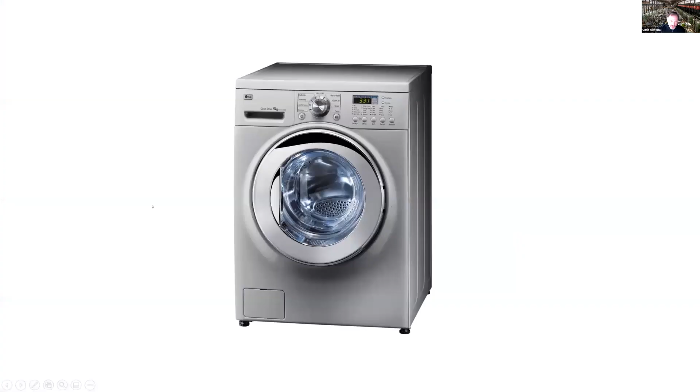Not letting me advance. Okay, so this is an LG washing machine, and I put this slide back in after hearing some of the other conversation, but they make this in South Korea by the tens of thousands. It can wash a household of teenage boys' clothes perfectly, and when it's finished, they're pretty much sanitized and wring dried.

It can do all of this if it has 4 available standard components, attributes: power, water, space, and discharge. So power, water, space, and discharge, if it has those, this thing will work in Korea, it'll work in New Jersey, it'll work in Palo Alto, and it'll work on my front porch in Alabama, no problem. In the absence of any one of these attributes, it is a very expensive, complex paperweight. So the point is that for industrialized construction to work, it needs an ecosystem to tie it together.

So in 2008, we had an architecture company, we still have, and it's doing a number of things that are challenging. We had just gone from kind of a land of plenty to a land of emptiness, and it gave me time to rethink what we were doing as an industry. And so we started with what the future state is of what we wanted to be by understanding what the current state of the architecture, engineering, construction world was.

And so the future state was not this siloed AEC industry that we have. It was envisioned as something that was different. We called it design, manufacture, construct, and we replaced nouns with verbs, with the notion that we would go from architecture to design and action, that we would add manufacturing because intuitively, even though we hadn't figured anything out about it, we knew that it was an incredibly important component, and we would go from construction to construct, and we would think of these things as a singularity as opposed to 3 discrete pieces that happen in a flow.

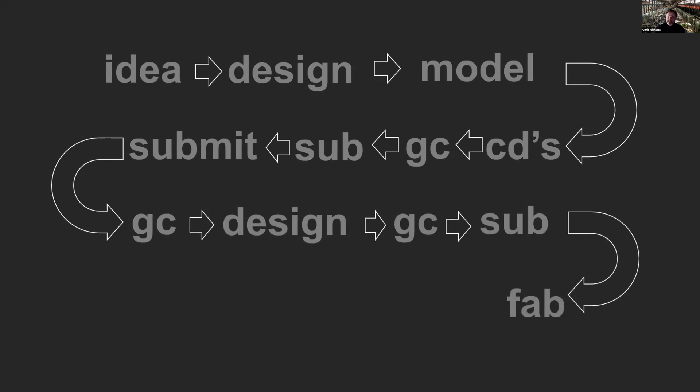The current state goes from idea to design to model. From model, it goes to construction documents. It goes from construction documents to general contracting, who break it up into subcomponents, which go out for submittal, which then go back to the GC, which then go back to the designer for approvals, which go back to the GC with modifications. And you get this insane project flow where way down here, eventually, we get to use it, or someone gets to use it.

And most of the construction technology is focused on the gaps between each one of these phase gates, and they are looking to shorten those gaps. And we started with this notion, or we explored it some, but we really came up with the realization that no matter how small we made the space between those, it would not create the 2 by 2 by 2 effect that we were looking for.

So we went from model to fabrication as the idea, and how would we set up a future state that would allow that to exist, because it's really more complicated than it looks. And the objective is not to work within the existing paradigm, but essentially create a new paradigm that replaces it.

It's undergirded by technology. Our technology is probably the dumbest technology on the planet. That doesn't mean that we haven't been working hard on it. Amy's got much better technology, though we use a good bit of hers. But the idea is a technology platform has to undergird some of these analog processes that we work on, and we take material constraints and we work those with design constraints and logistic constraints. We go from there. All of that resides on the cloud.

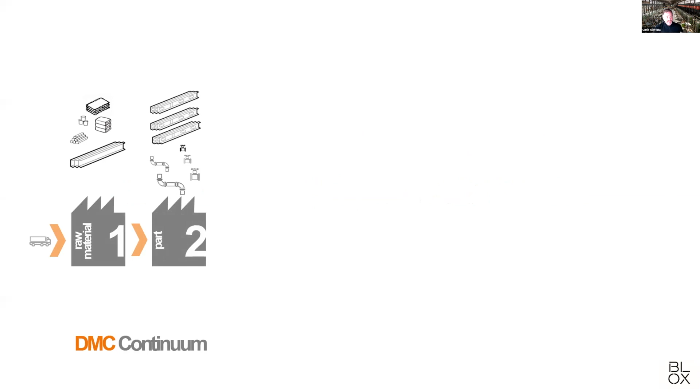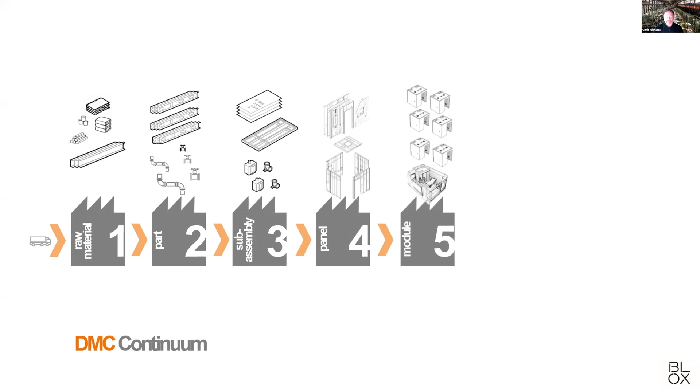All right, so this DMC continuum is important. It starts with idea, design, model, fabrication. From there, we'll break down fabrication and look at it a little tighter. If we take raw material, we use G-code to turn raw material, whether it's coil or stick, or plate, into specialized parts with digital tools. Those tools then turn into subassemblies that are put together by operators versus craftspeople. Those pieces are then added to panels. Panels are turned into modules. Modules are turned into what we call an Uber module, which is a large module, which turn into buildings.

And it's unnecessary to think of this linear process this way, because I can go from raw material to a subassembly, or a subassembly to a building directly. I can bypass any of the other pieces. So the notion of what we are, or what we think the industry needs to be, is not one or the other, but simply an optimized path through the conversion of raw material to building. And there are many, many neural pathways to get there.

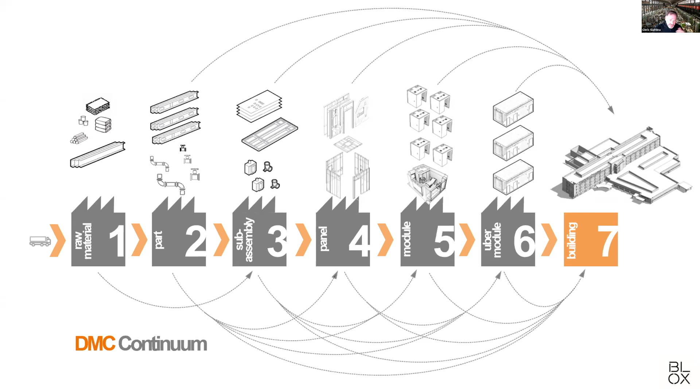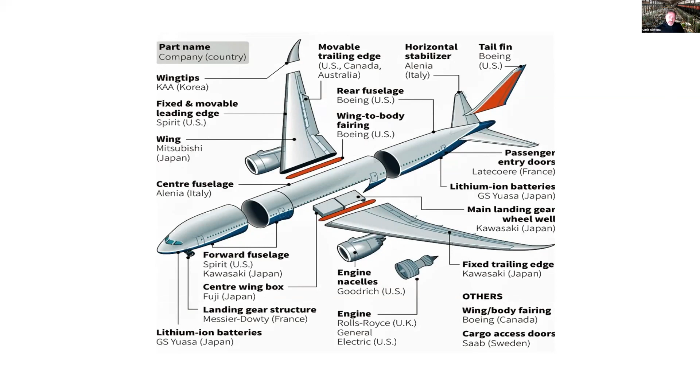So the next point is what do you do with DMC and how do you apply it? We use a methodology called chunking. It is not our invention. It's not even Boeing's invention, but it is something that they made famous with the 787. This really complex airplane is made in 22 chunks in 9 countries. This chunk happens to be the forward fuselage, made in Japan.

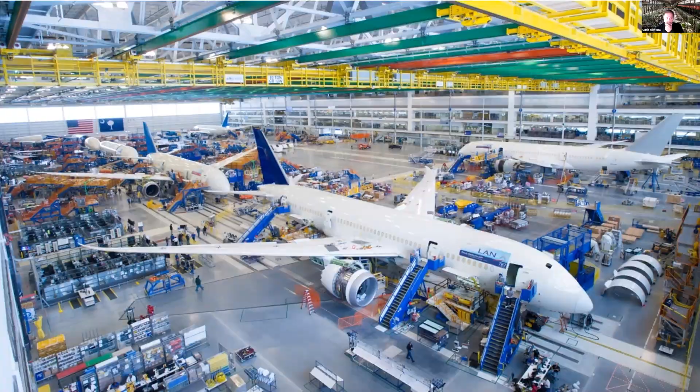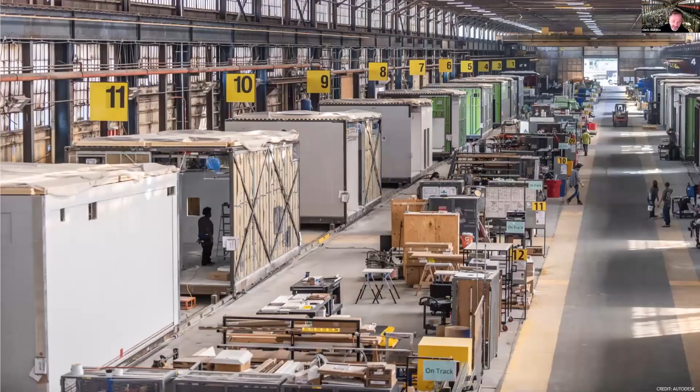It is completed down to its paint, and goes with the other 22 parts to Charleston to create what I think is the construction site of our hopefully near future, to make really complex pieces fast. Our chunk is an Uber. It's 15 feet wide and 15 feet high and 60 feet long, and it's packed with complexity. And we make it in a plant that is producing 20 of these a week. It is putting any number of them together to make one building. The resultant is space that does not look like the space that's made of the parts, but rather it can be open and well lit.

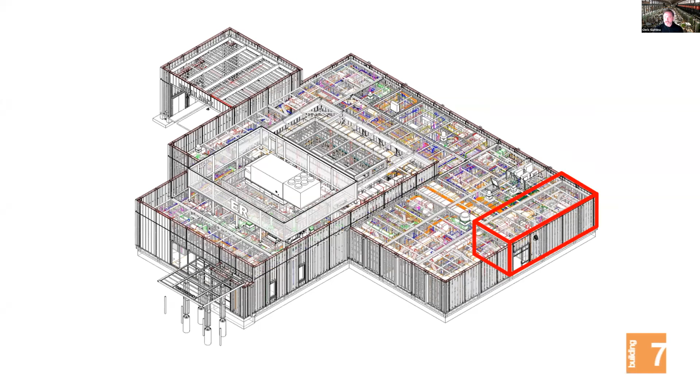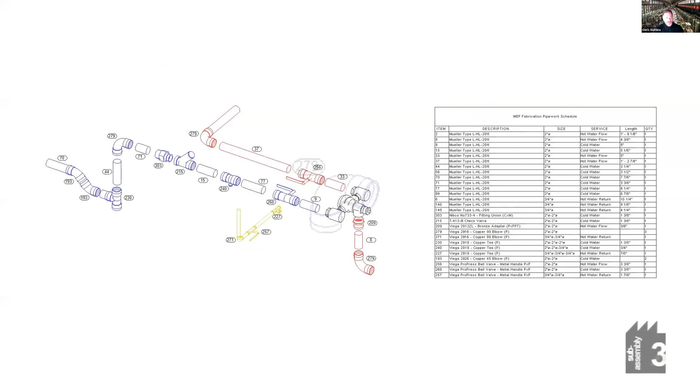If we zoom into that, you can see that it's chock full of complexity. That complexity can be broken down into granular forms that we make as nested parts. This piece is a MEP rack, which has in it MEP parts, which are broken down into a bill of material, which goes all the way down to how do I buy a copper elbow.

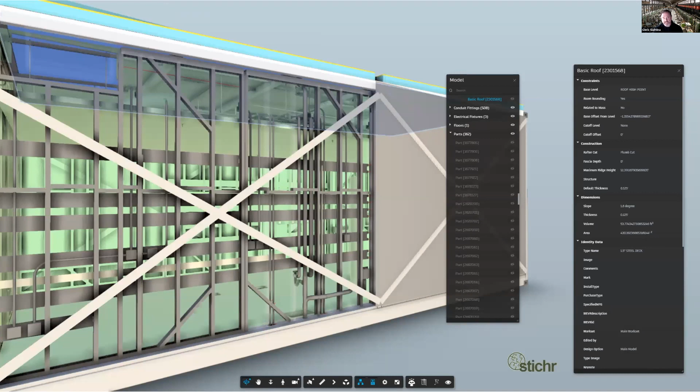Those pieces, using BIM 360 and the Autodesk Forge platform, we've created applications that go on top of that called Stichr, which essentially allow us to take all of those parts and stitch that to the bill of materials, and then convert the bill of materials into G code that cuts parts. A significant amount there probably should be unpacked, but going fast.

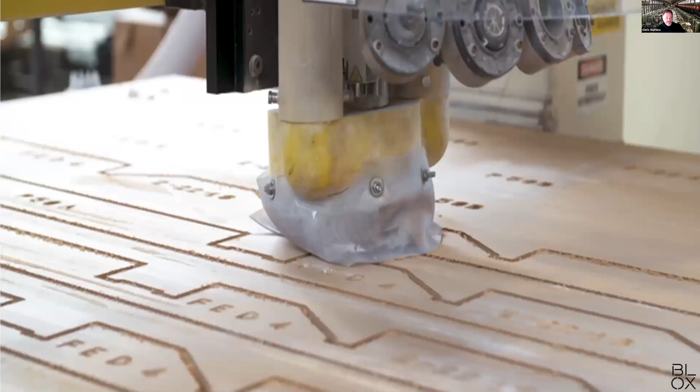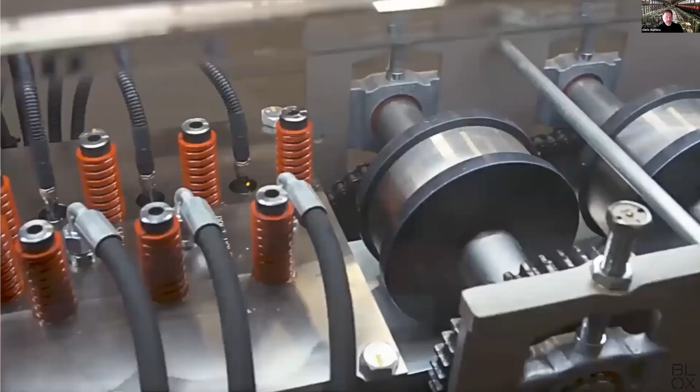We have opportunistically looked at technology. We use digital fabrication in every place we can where it makes sense and where we can afford it. In this case, we're cutting MDF with a CNC router. In this case, we are extruding CNC coiled steel into bespoke parts. In some cases, we're using 3D additive printing to make fixtures and jigs that allow us to put sub-assemblies together.

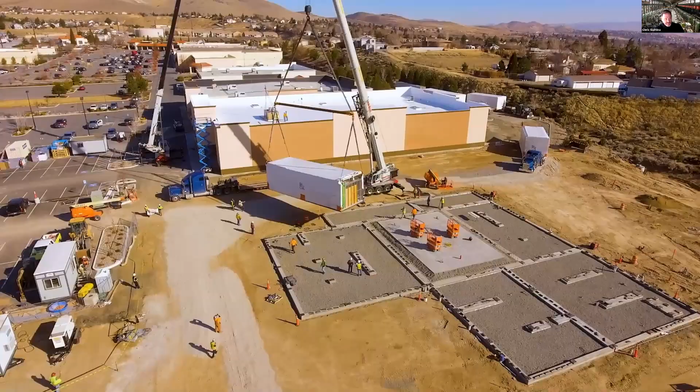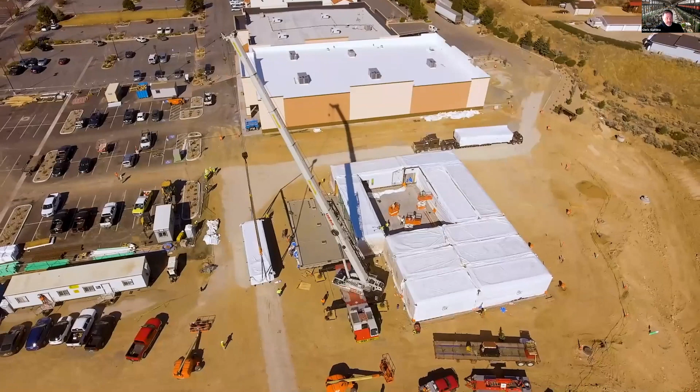This is a quick minute of what all of that looks like right now. So this is an acute medical facility. This is a freestanding emergency department in Reno, Nevada. It's coming in. You can see in the background the trucks are lined up. It takes about a day to set this level of modules. This is about 15 modules, and it's about a 15,000 square foot building.

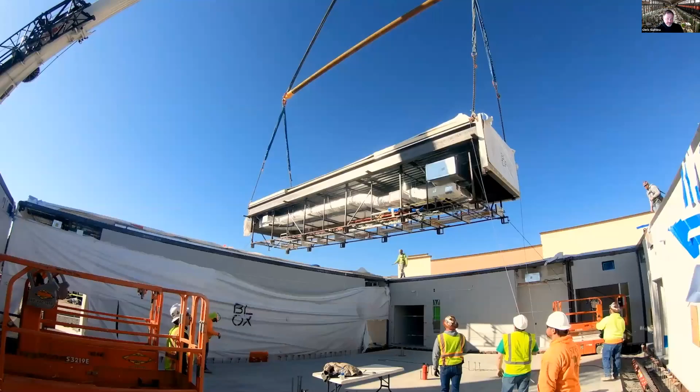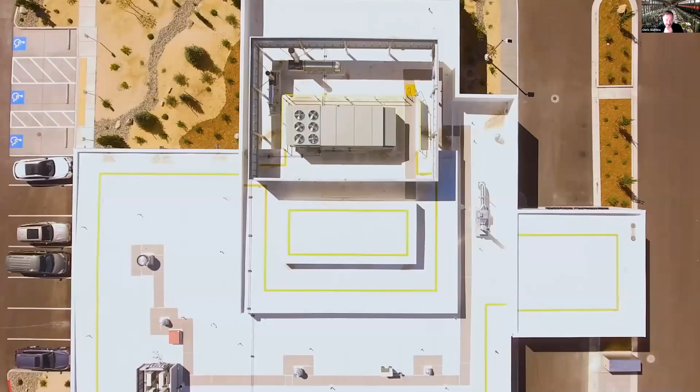The piece that's being lifted up here is a roof module, which will span the big open space in the middle. It's really jam-packed with a number of complex pieces. Each one of these things kind of all go together pretty quickly to make an overall building. And when you walk through the space, it is interesting, well lit, and kind of appropriate for what type of space it is. This is about a 5.5 month delivery from site mobilization to turnover. Typical would be about 12 months for this type of facility.

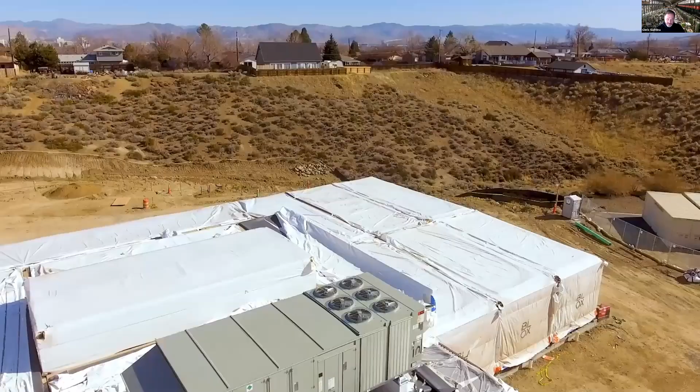I'm going to flip over and show you what we're doing. This is a project for Walmart Health.

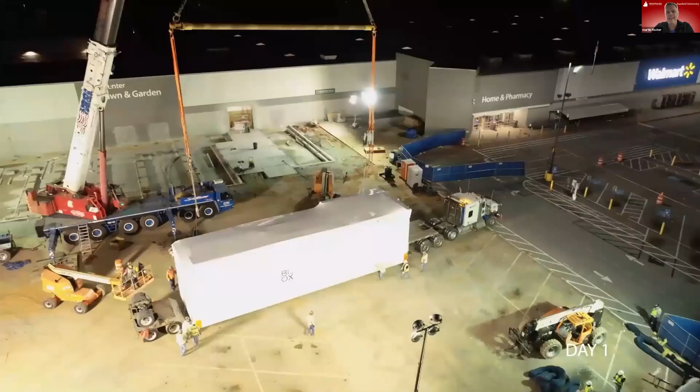Chris, just highlighting the time. Yep, yeah. Sure. I've got like 30 seconds.

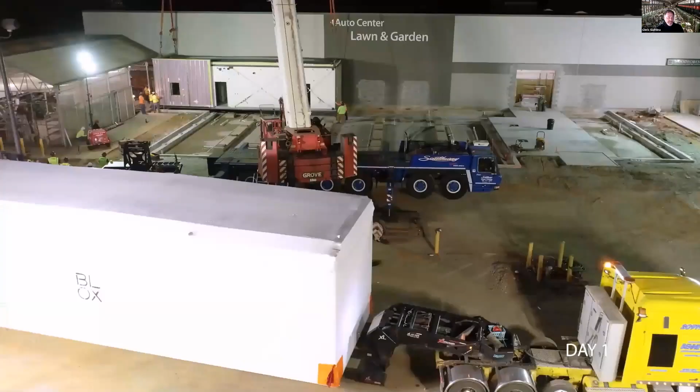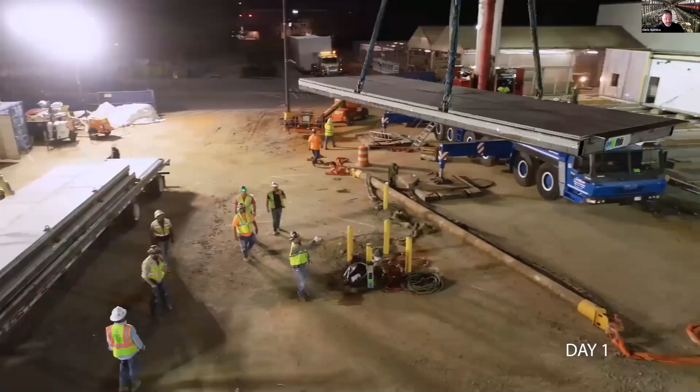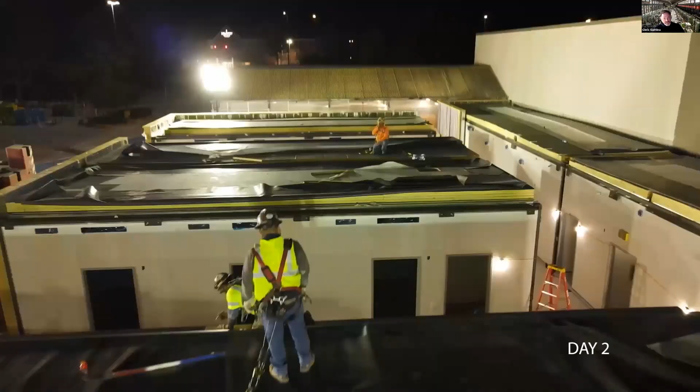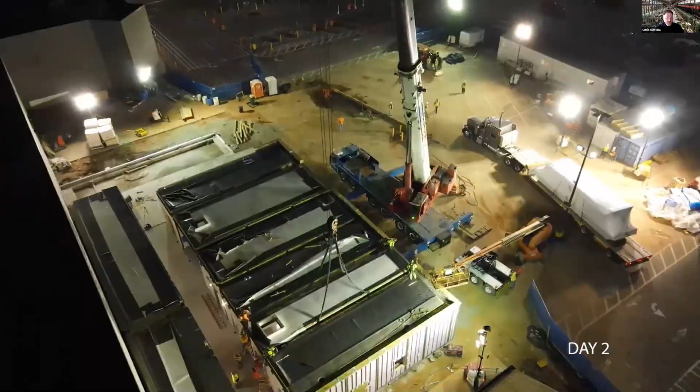So okay, this is in a series in Georgia. What you're looking at is about a 45-day process to turn a kit of parts into an operating clinic. Those pieces are getting faster and faster. We're delivering one of these to the owner every 2 weeks right now. So it's really starting to hit a scale that the industry needed, just to kind of prove that we could open a building every 2 weeks, produce one, et cetera.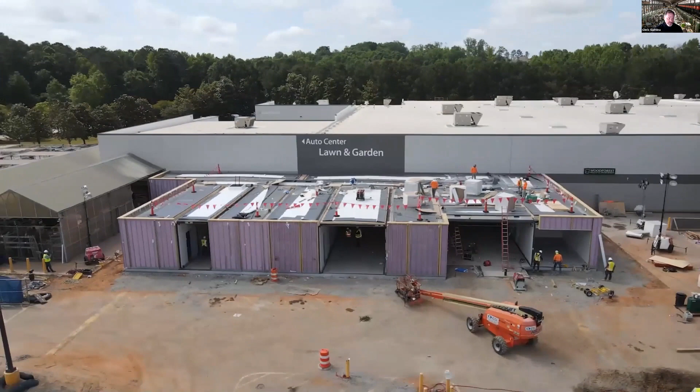When you look at this, it's largely, this is after day 1 or day 2 in that particular spot. And then you end up with an inside clinic that's finished. These don't feel like the traditional spaces that you might expect to see in this area. So that's the idea. I'm kind of wrapping up.

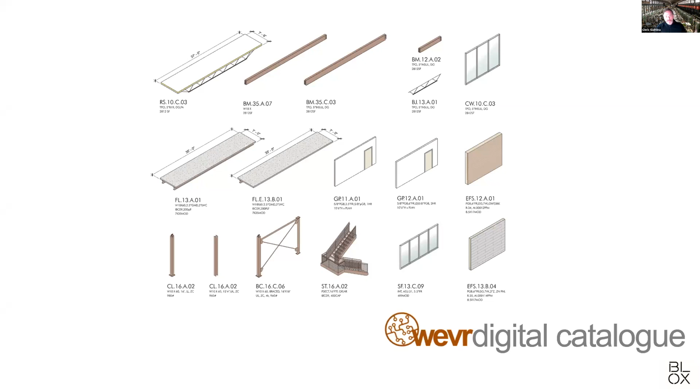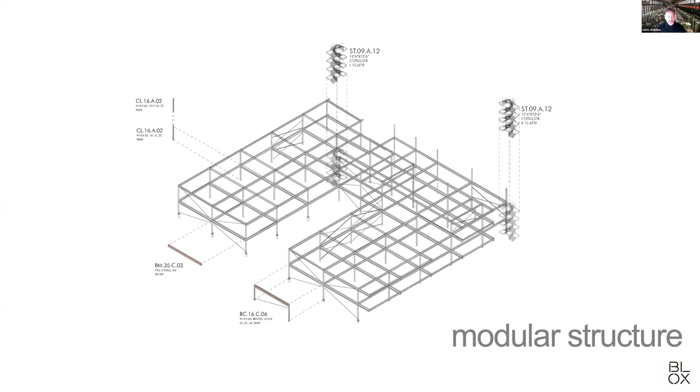The last piece is that catalog turns into something that makes bigger pieces. Those pieces can be used to make steel structures that are a kit of parts, that work with modules that are a kit of parts, that nest to create really complex buildings that are site specific and hopefully high performance and beautiful. That's it.

Great, thanks, Chris. That is exciting. So are you run over by demand right now, or what's the bottleneck in getting more of these buildings out, which we desperately need? Oh, well, it seems to me you desperately need them. Yeah.

The question for us is, we've been doubling in size, compounded annual growth rate of above 70% for the last 5 years, and that challenges infrastructure significantly. And every year that doubling, or it's not quite doubling, but it feels like it's doubling to us, creates a condition where everything that was designed is now insufficient, right? So we're rebuilding this infrastructure daily.

But at the same time, we're increasing production across the whole platform. We're able to right now develop 5 programs for 5 clients, and if you think of them as kind of volume buttons, we are able to maintain a steady manufacturing and delivery rate because we can turn up and down volume. In the beginning, it was very hard to do that. It was feast or famine. Now, as we are gaining scale, which was painful at certain points, it's helping us. So it's just taken a while, Martin. It's a work in progress.